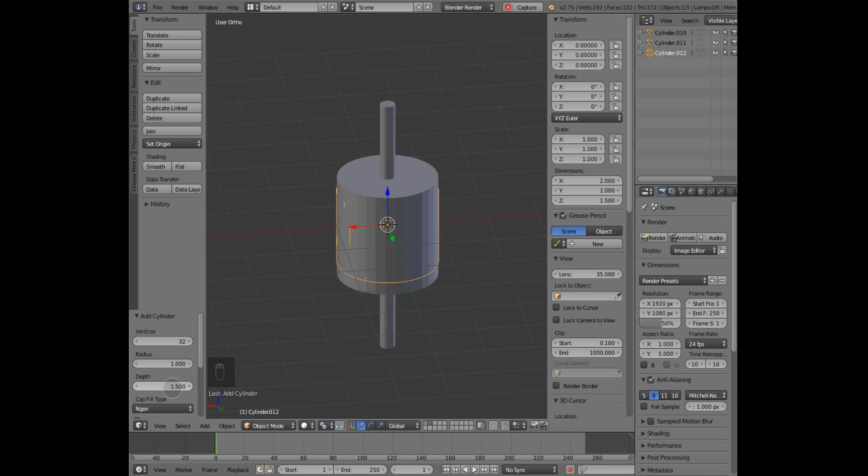So there we go, this is the base of the thing, and then we're going to add another cylinder. There's a lot of cylinders in this part, and this one is going to be just 1.5 long, and I'm going to rotate it along X by 90 degrees. I'm going to move it along X by 1 centimetre in the negative direction, and there we go, we have a secondary part.

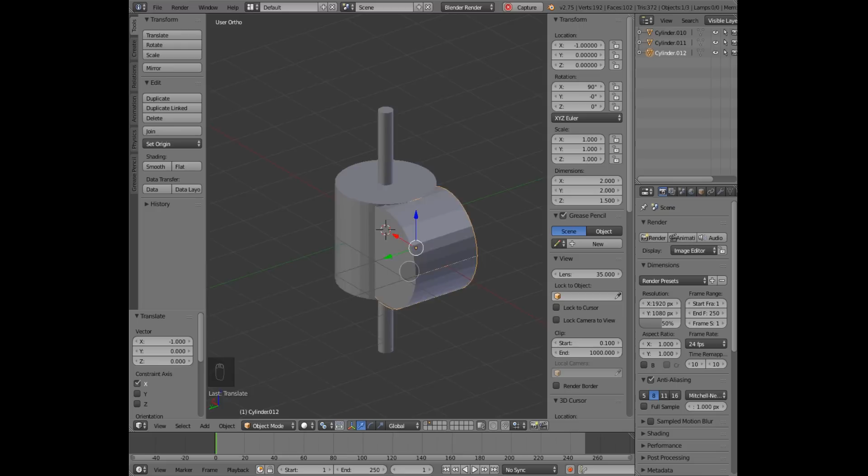And what we're planning to do is put a split down through here, and then we're going to clamp that closed onto this rod with a knob and a bolt, and I've got quite a clever scheme for being able to use a bolt in a 3D printed part. So next what we need to do is we need to make the split, and that's fairly easy.

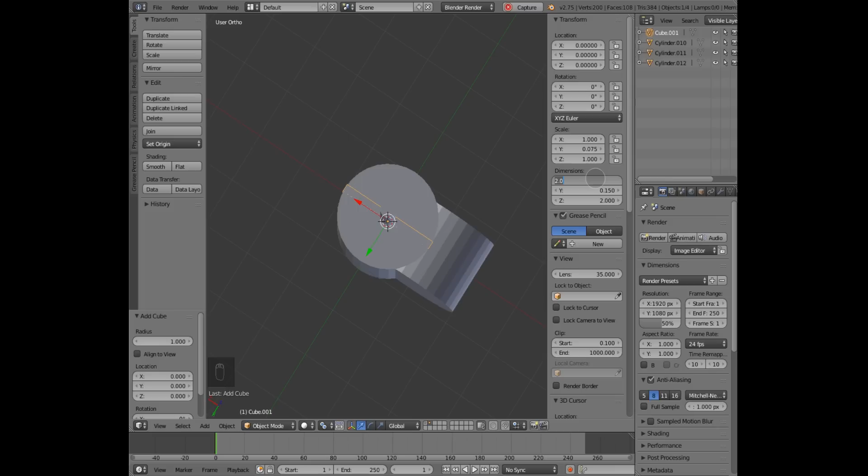What I'm going to do is add a cube. I want it to be about 0.2 maybe in that dimension. That looks about right, maybe 0.15. It's got to be about, well, we'll just leave it like that, and I'm just going to make that 3 long in the Z because we want it bigger.

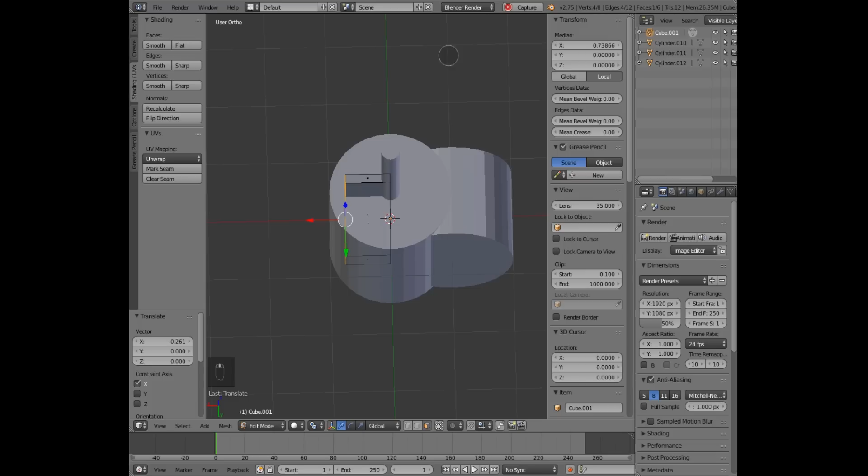Okay, and then I'm going to take this face and I'm going to move it to 0. I'm going to take this face and move it. It's more by eye. I want a fairly small area just here, so I'm going to make it 0.7. That looks about right. And I'm going to take this face again.

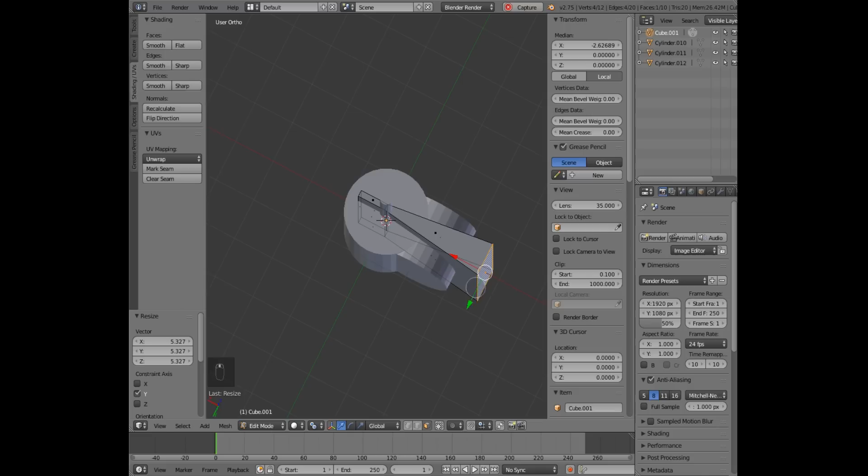I'm going to extrude it, and extrude it all the way out here, and I'm going to scale, so I'm hitting S, and then I'm going to hit Y to choose the dimension, and I'm just going to widen that out until about there. You see we've got a nice wedge shape, and if I just hit numpad 7, you'll see that maybe that's a little big, so I just scale Y again, and there we go.

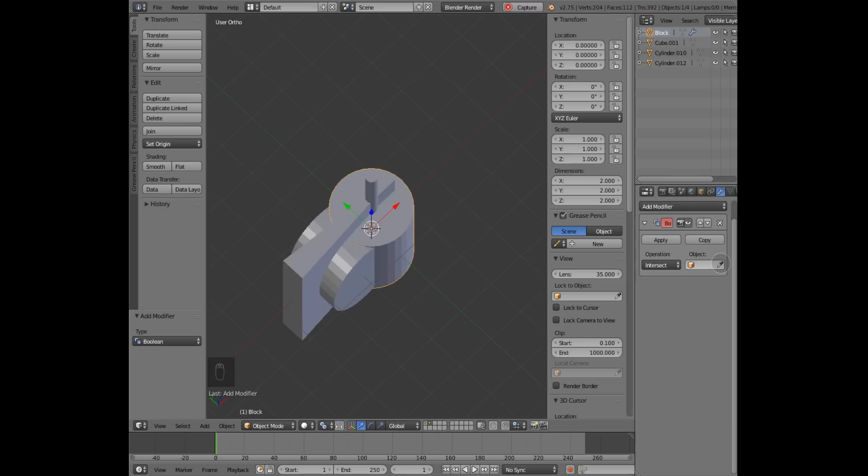We've got a cut. So now we actually want to build this into some geometry. So we select our original cylinder, and let's just rename that. For clarity, let's rename it block, because I think it's going to be a block. And I'm going to go into modifiers, and I really like using Boolean modifiers for all of my 3D printing things. It allows me to adjust things later.

I've just selected the cube there, so I actually want difference - and you can see immediately it's got a nice cut out of it.

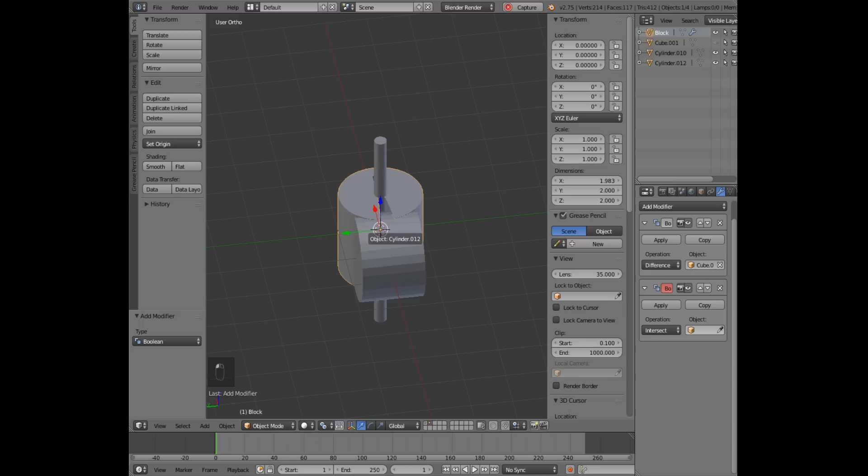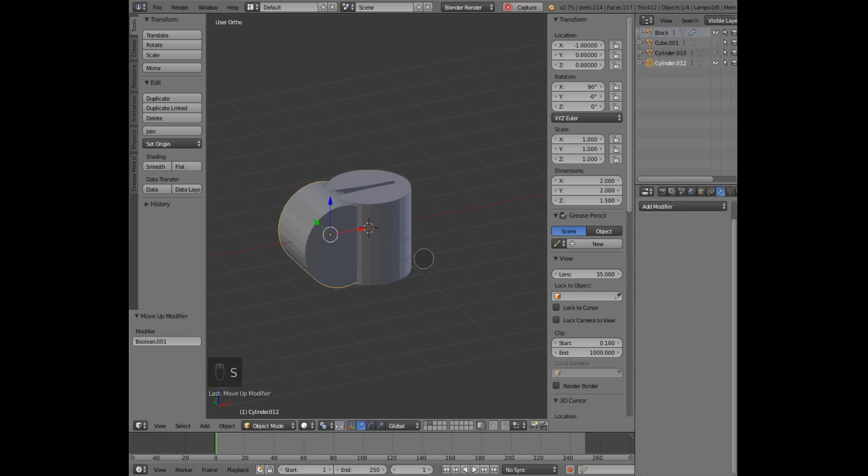I'm going to add another modifier, this one is the cylinder, and I want it union - that's in the wrong order, so I need to move that to the top, then hide those other cylinders. Something is wrong. Scale 0.99, hide that, see if it works. It does. There we go, back on track.

Add the boolean for the other operation. It's cube 001, we want to make that difference, and you can see it's coming together already.

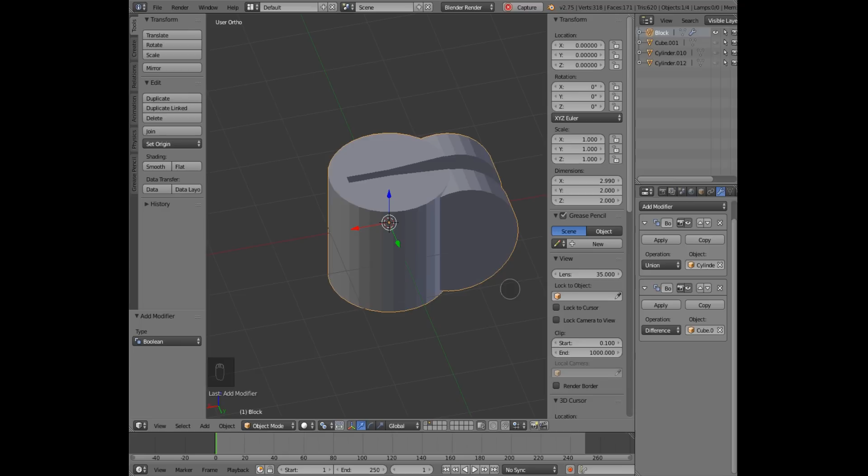So we're just going to add another boolean modifier, this time cylinder 10, and we want difference. You can see it's already looking quite a lot like a clamp - if you imagine squeezing on these two parts, it's going to flex inwards.

Next we need to model the bolt hole, so we can see where we're going to have it. I'm just going to add another cylinder - lots of cylinders. Radius of this one will be 0.2, so it's a 4mm hole. Let's make it 3 long, just so it's clearing everything.

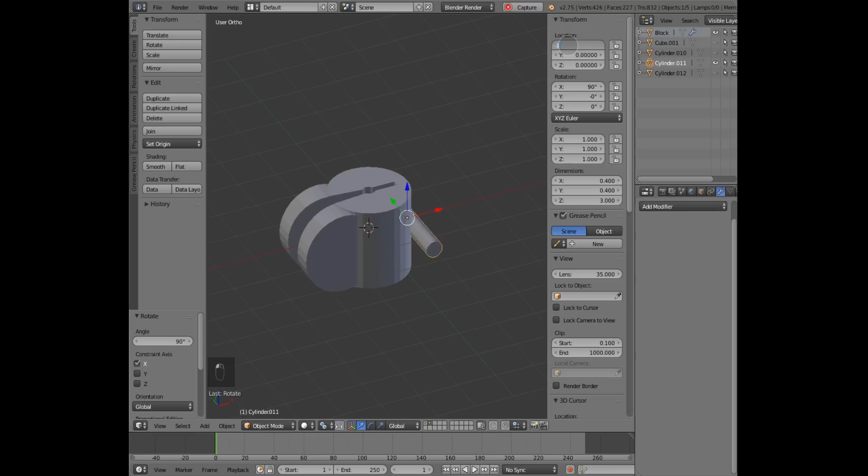Just going to rotate it in X 90 degrees. We're going to set the X coordinate to be 1, -1, and you can see it's in the middle of that cylinder, so that's good. I'm just going to get rid of it to see.

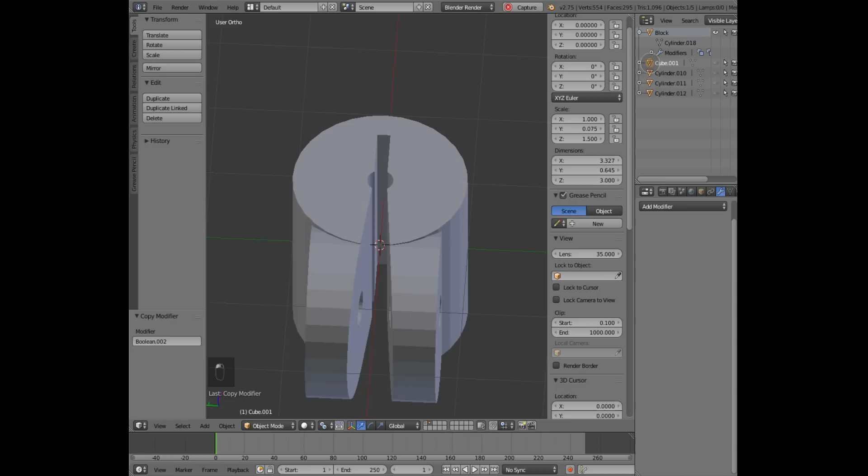So now what I usually tend to do at this point, since we're getting a lot of parts in our layer, is make this a parent. These are parts that we know are good, and they're really booleaning just this block - if we were going to have another solid, we really want it to be separate.

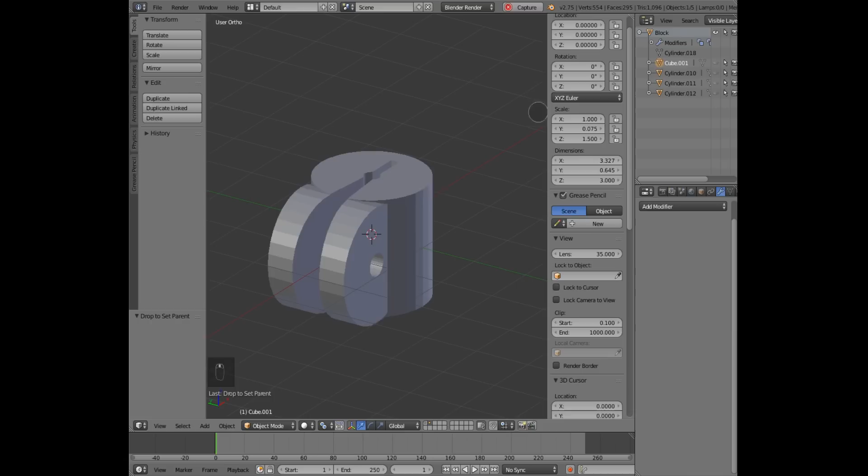It's good so far. What I need to do next is create a place for the nut to live right here - that's usually done with a 6-sided thing. Don't worry about the boolean sort of disappearing and appearing - if you have any problems with that, select the part that's got the booleans on it and hit tab twice, which takes you into mesh edit mode and back out, and that resets the boolean. That's a nice tip.

So the radius will be 0.4, because the tip to tip distance on an M4 nut is 0.766 centimeters, and we're going to round that up to 0.8 because we really want our nut to fit. We're just going to make it one long.

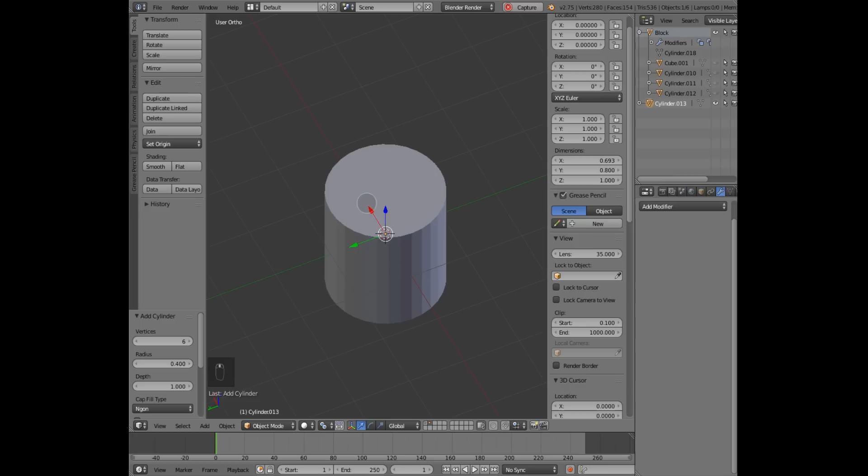Now I'm going to move it away a bit for now - actually this will need to be at -1, and we can RX90. I've turned into edit mode, so now I'm editing the mesh rather than the objects, so I can move that with GY, and then it's 0.5 because it's a 1 centimeter long mesh, and that means our coordinate reference is now at one end.

Now I'm just going to double tab on that to get back our mesh, and from here I'm going to hit 7 and hit Z, which takes us into wireframe mode, and then we can actually see the parts inside.

So what I'm going to do is put this - well, it has to be 3mm in, and that's about 2mm out, so it should be at about 0.4. That seems about right. We need to have 3mm there because the nut is 3mm long.

Then we need a relief in here, because the knob is going to have to be bigger than this nut, so it has to have a bigger cylinder cut out of it than the nut. So add another cylinder, and this time go back to 32 sides - I like 32 sides, it's good.

I'm going to make that 15mm wide, that facing, because the 8mm nut will fit beautifully into it if I just move it to -1. You can see lots of space around it, and you don't want to be printing thin walls around your nuts, because when you give them a bit of pressure they'll just break.

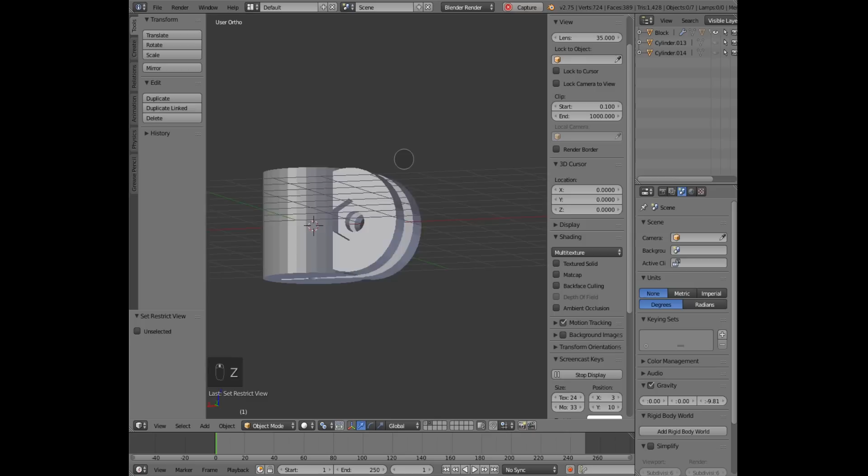And you can see that's where the nut goes. Beautiful, sitting in that piece of plastic. That's the mount for the thing.

And actually, that looks a bit deep. That looks like it is going to leave, well, it's just bigger than it needs to be, isn't it? So I'm going to GY 0.1 minus, okay, and that means that we've got a thicker wall here.

We always want as much thickness in our parts as possible because it's better for the printer and it'll make a stronger part. It means we can have a lower infill.

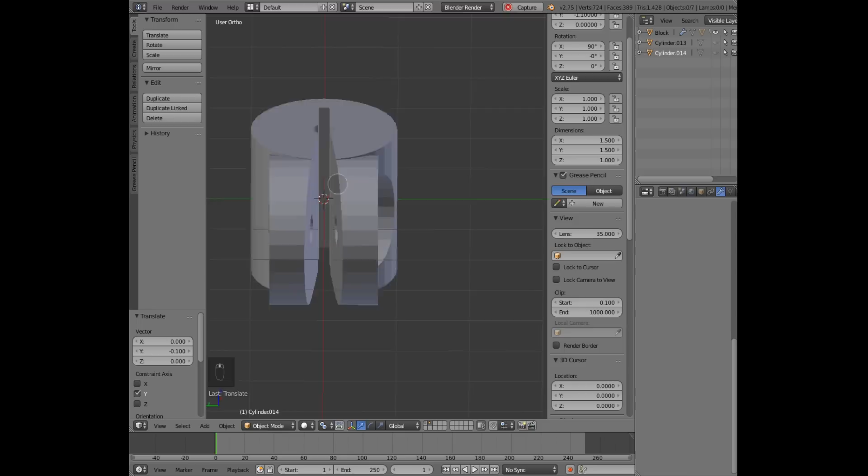So that's our clamp. It's a really simple part, and I'll show you later why I was deliberately sticking to the booleans, why I like them.

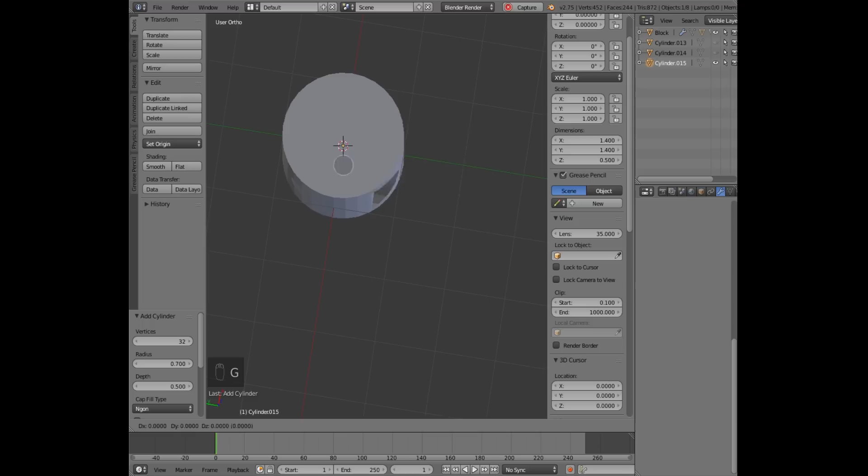So next, another cylinder. We're going to make the little knob that allows you to adjust it. Okay, so this needs to be, I'm going to make it a mil smaller, and it's only going to be 0.5 long. We're going to move it out.

RX90 it, refresh that, it's a real pain, and then we know where it needs to go. It needs to go at x minus 1, and I'm just going to go to the overview again and just move that there.

And in fact, what I'm just going to do is GY 0.25 negative, and that means that our part, the center of our part, is right on that end. And if you're getting a complex part, it's always worth having the center on a face, unless you got a good reason for it.

Okay, so let's make it minus 0.6. And I think what I'm just going to do is push that another 0.2, no, another 0.1. So that's 0.4 long now, so it's 4 mil long.

Okay, and then we're just going to extrude 0.5, scale by 2, extrude 0.5, and you've got a nice big handle there.

In fact, it's a little bit too big. I'm just going to select that loop, and we're going to scale 0.66, nope, 0.75, and that's a little bit more reasonable.

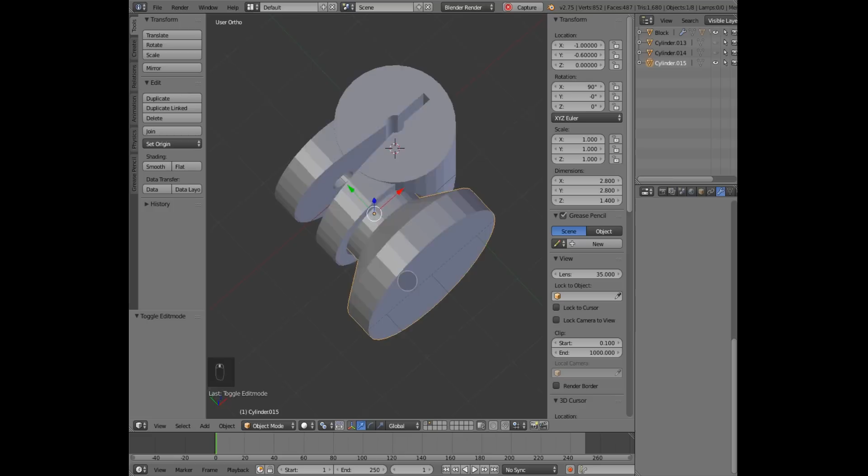Next, I'm going to add some sort of gears on the outside, and that allows us to have a better grip, because we want to be able to tighten this right down.

So I'm going to duplicate that part, and then I'm going to invert that selection, delete all the faces, and we've just got a ring of faces around here.

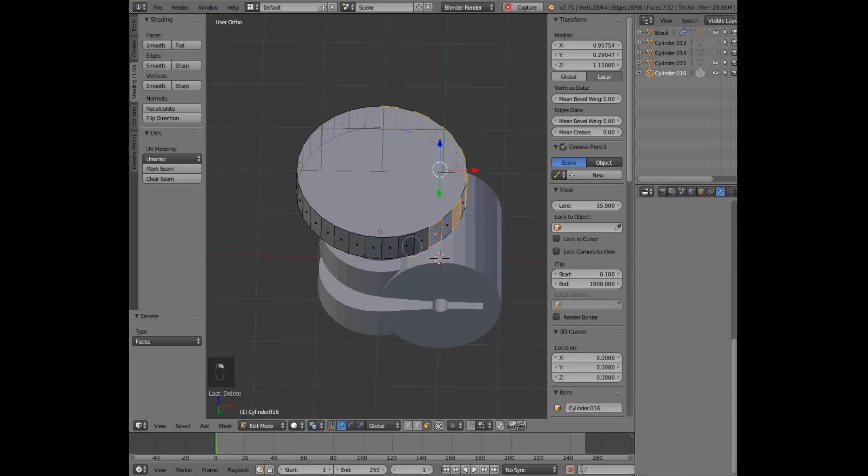Right, now, every other face, there is a way of doing this, I'm sure, but it's actually really quick to just select. Ooh, there we go. Right, and then I'm just going to delete all of those faces, because we only need every other face, and then I want to extrude individual, like this.

Okay, now if we just turn on, see, actually we want that selection, select inverse, that should fill those in nicely.

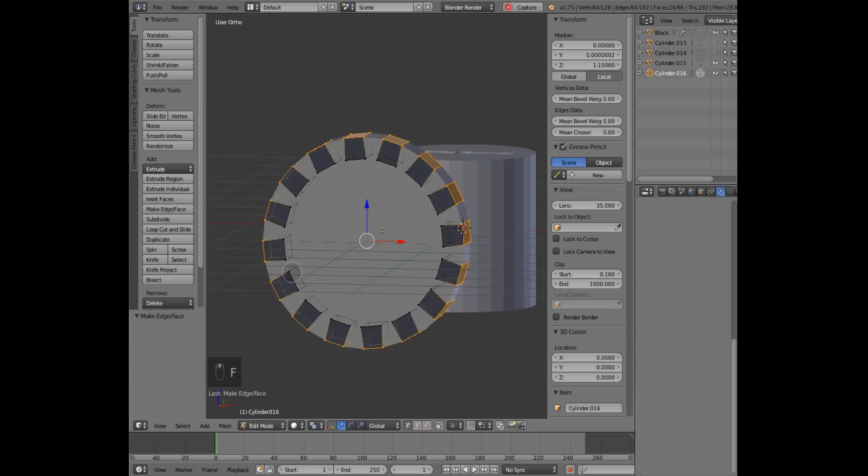Okay, now we've got some problems with our UVs, our normal direction, so we're just going to recalculate those, and you can see everything turns white. Scale Y, because we want that bigger.

And then what I'm going to do is select all of these outer faces. So if I just hit C, we've got the paint selection tool, and hopefully I won't select too many of the main faces.

So I just select that. I really screwed that one up. Okay, and then I just want to switch over to individual origins and scale Shift Y, because we don't want it to get bigger in the Y direction.

And then we just widen it out, do it till it's basically touching, switch to median point, scale that out a bit, and then we go select similar by area, and then we just...

I think we want to scale those out a little bit. Okay, and maybe just scale them individually a little bit. Shift Y. There we go.

Right, now, bit of Boolean magic time. Just going to Boolean that, select that, switch it to difference, and if I hide this, you suddenly got nice cogs. I'm just going to make that parent because it's a nice parent part.

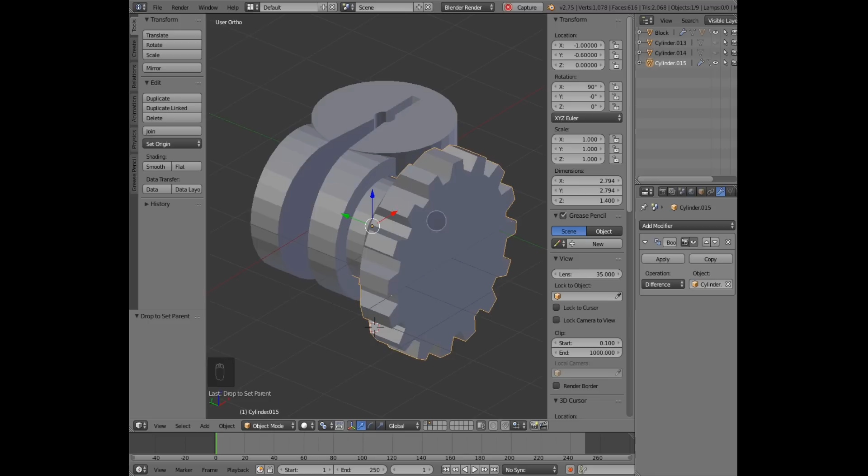Okay. Now, we need to have a way of getting the bolt and the nut in there. So I'm just going to go to the nut, find... okay, that part. Sorry about that.

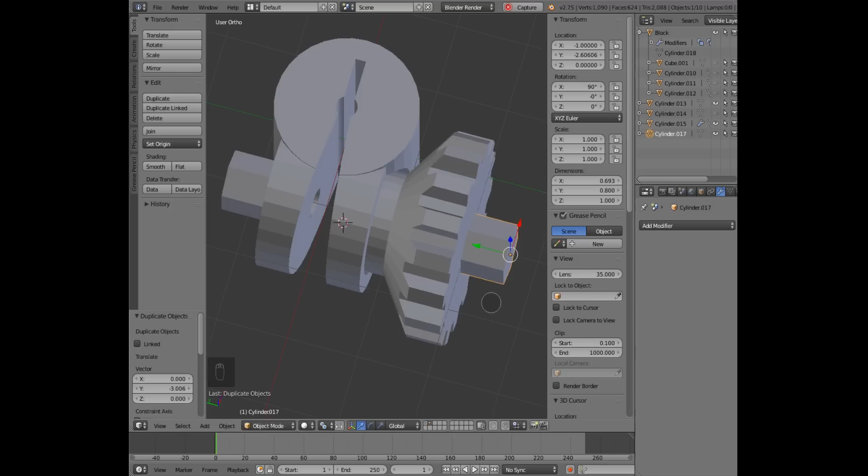And just Shift D that on the Y-axis. Okay, scale Y -1, so that's just flipping the part. Okay, scale Y, make that a bit longer, 7, Z.

Okay, now we want 2 millimeters of geometry just there, just to give it a bit of strength, so that's -0.8. And then we want to go copy that, give it that to Boolean against.

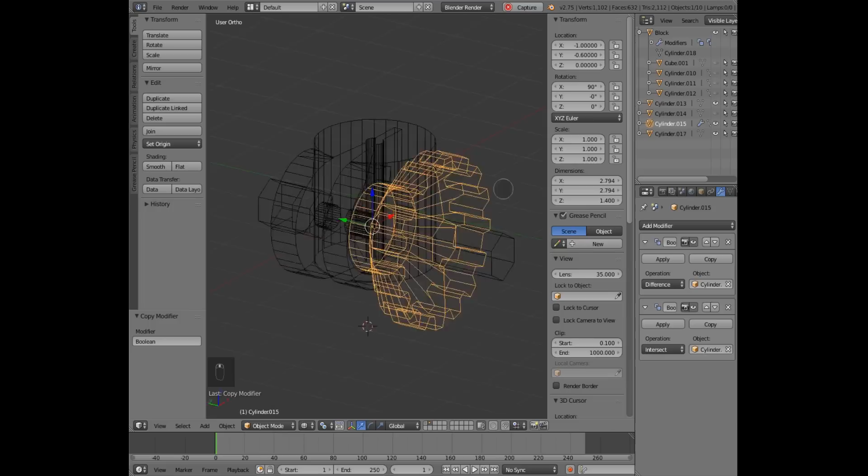Okay, and now we've got an interesting Boolean bug, and I bet if I go into union intersection, you see that's not at all what we want really. So we would put it back to difference, and then we go Control A, rotation and scale, and then it still doesn't work. So what do we do?

Try, we'll just put it into intersect for a while. Okay, it's a mysterious bug.

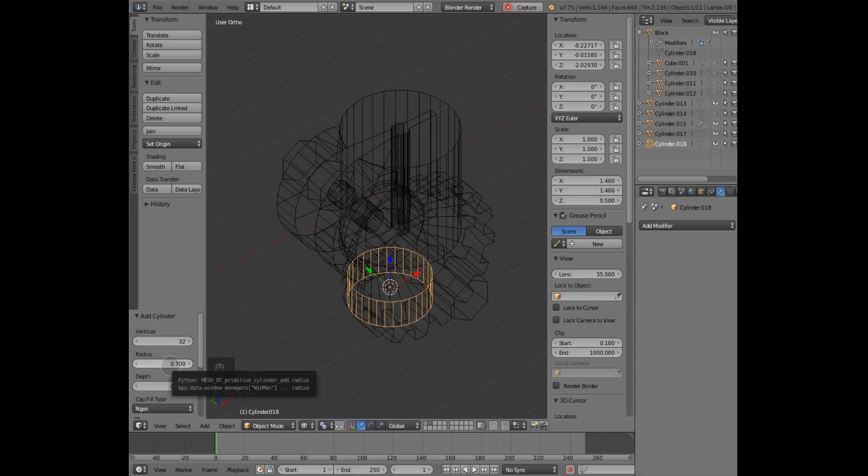Now we want a cylinder. 32 sides will do again, and the radius, I'm just going to get one of my bolts and measure it, and we've got a 0.75 millimeter head, so I'm now going to do a 0.75 over 2, 0.375 radius, and the depth will be, say, 1.

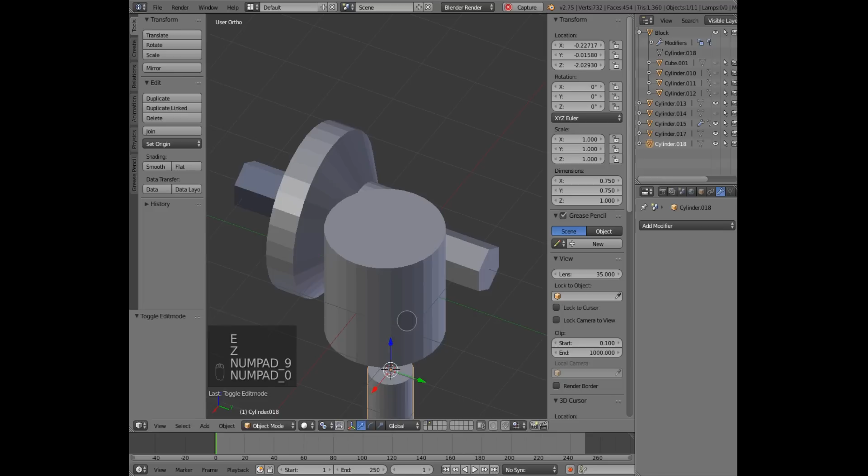And then we're going to G Z minus 0.5, and then we're going to R X 90, nope, hang on, R X 90. We can see what our problem is there.

That nut has somehow got all of its normals reversed, so we're going to tab that. Okay, and now we can see that has gone back to doing what we thought it was going to do.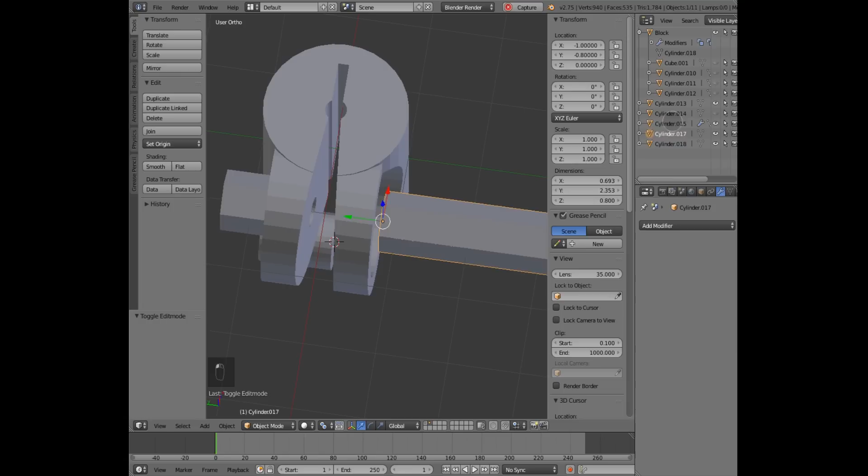So this is a good time to name our part handle, so we know that that's the one that matters, and then just go cylinder 18 again.

What do we want to do? We want to set that at the minus 0.5, 0, 0. That should be -1 because that's the x-axis. It was the y-axis I was thinking of.

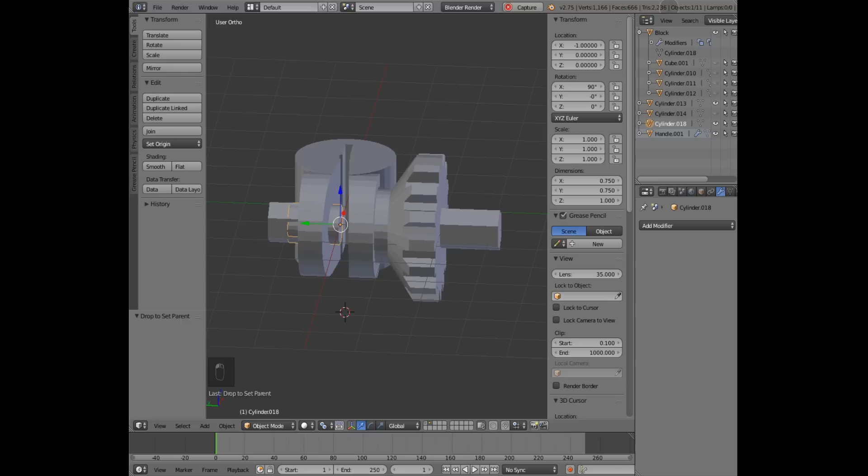We now RZ 180. So we just flip that round, and then if we go back to 7Z, we see, right, so now we want 3 millimeters in that nut, so that has to be minus 0.6 for the y coordinate. There we go.

And this I am just going to scale in the Y a bit more. Control A, rotation and scale, copy this, and there we go. So hide those.

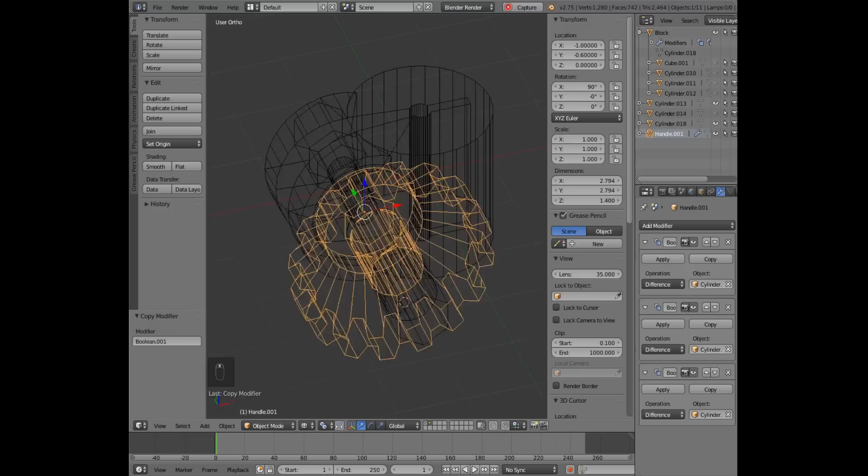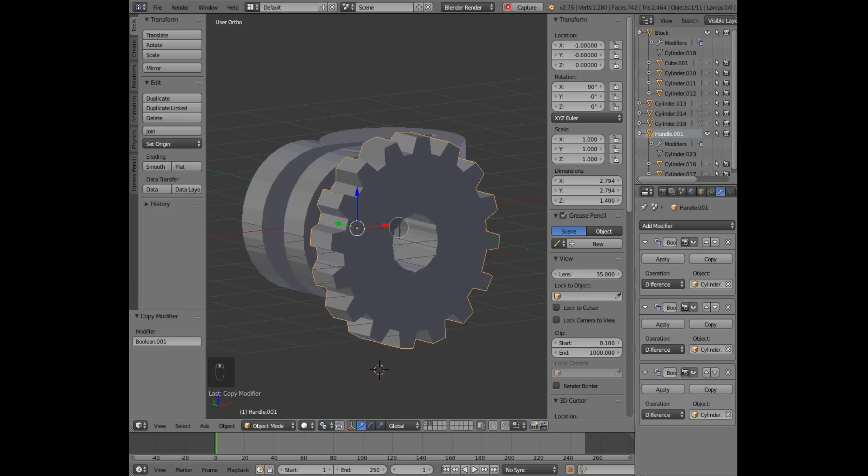And you have a more or less ready to print part. You can see, so what's going to happen is dropping a nut in there, and then we've got a pan-headed screw that screws into that nut, and then they lock together because nuts lock together when you screw them tight, and that means that you've got a screw basically locked into here.

Now it could come out this way, out here, but it's not going to, because on the other side you've got a nut dropped into there and they're screwed in, and then as you do this handle up you should get this to closing. So to get this out into an STL, I just go File, Export, STL, and then that's the handle, Export STL, and I do the same for the block.

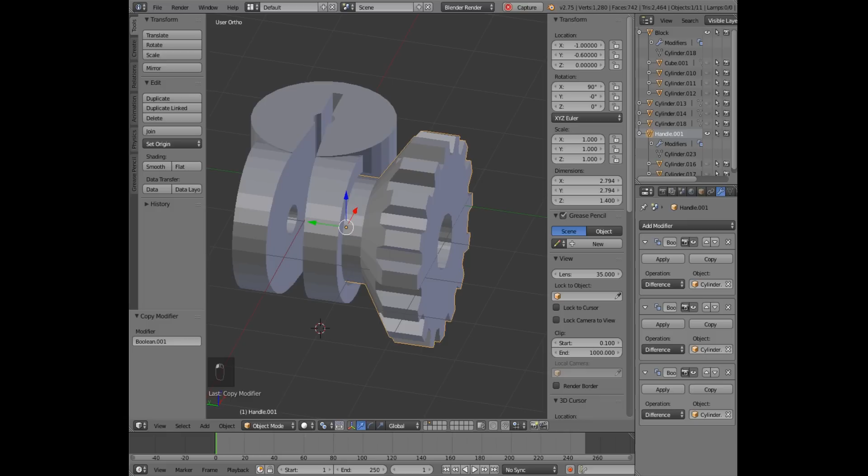Before you do that, it's probably worth doing a tab to make sure the booleans are fine, but as you can see it's sort of all ready to go. We'll have to rotate this round in the slicer because we want this side down, even though it's got a little bit...

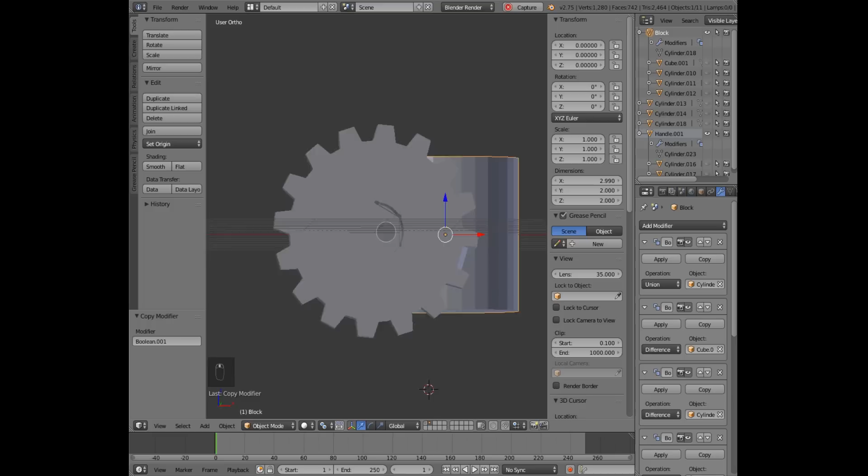Oh, hang on, hold up. What we actually need is to find this - completely forgot about that. Also, I completely forgot about adding some clearance, but that's not really necessary with the trick I'm going to tell you. So now what we need to do is Shift-D this, move it to the handle parent, and then I'm going to hide it, and then duplicate that, get rid of that - it's probably cylinder 18, I imagine.

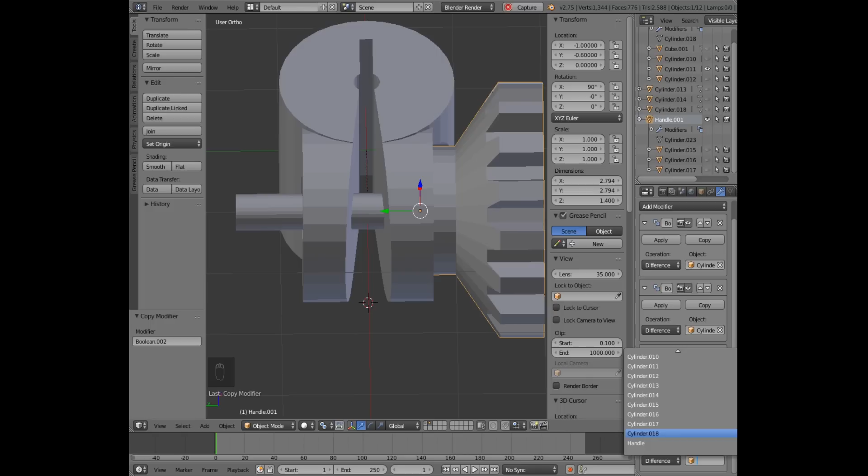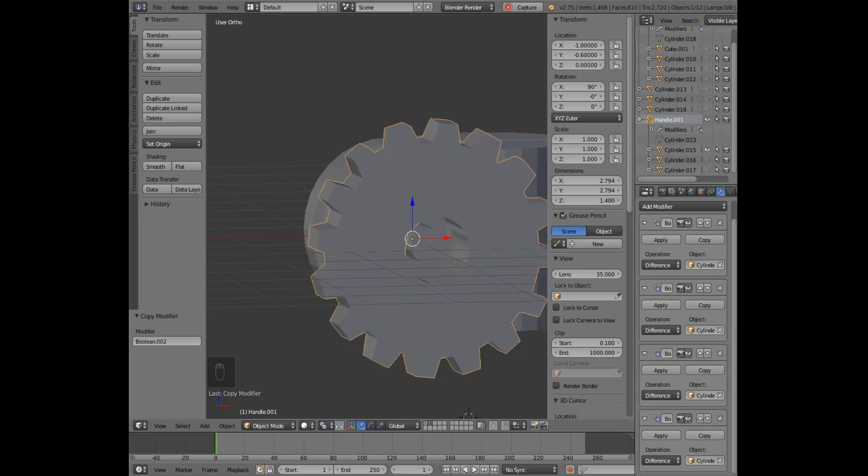So if I hide whatever... nope... mysterious. Cylinder 15, nice. There we go, 15, get rid of that, hide that. You can see it now, it goes all the way through. That's a lot more sensible.

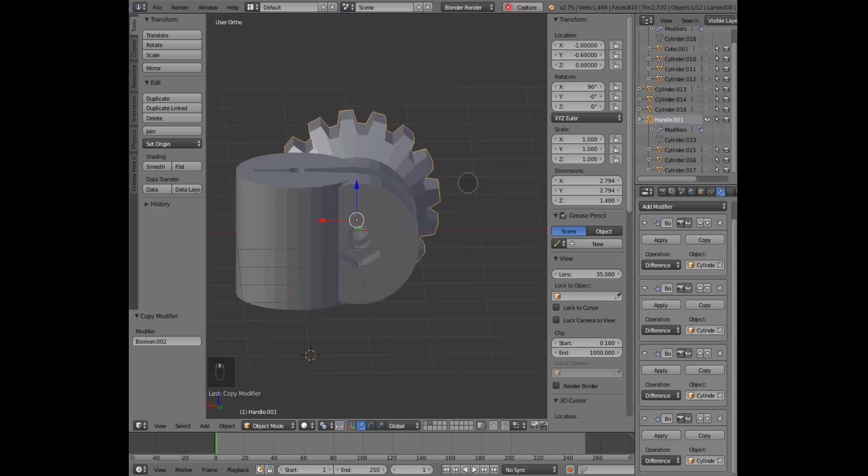Now, if we were not quite sure about our printer, we might make some of these holes a little bit bigger. I've already added some wiggle room in some of them, but particularly this hole and this hole might just benefit from being 0.5 mil bigger, just to allow more clearance. But I'm pretty happy with the printer, so I'm just going to save this, export the STLs, and then we'll get to the slicer.

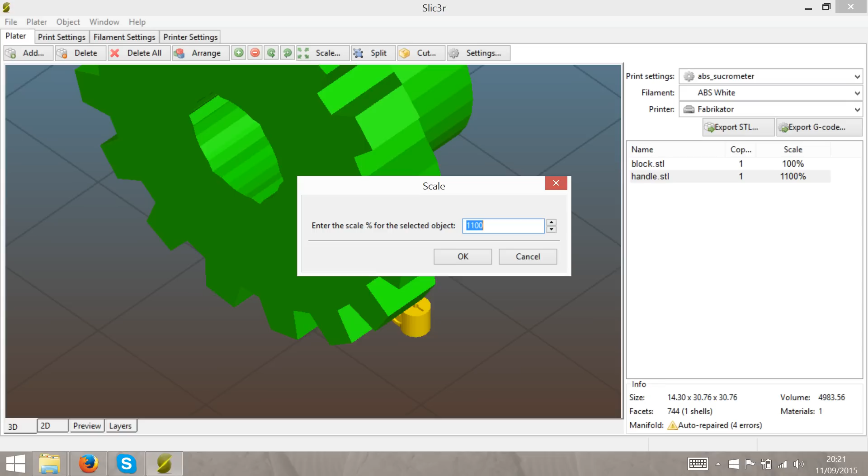Okay, so we've imported both of the models into the slicer, and as you can see they're really tiny. We've got to scale them up by a 10 times factor because Blender, and then we're also going to add an extra 10% to the scaling factor, so that makes like 1100, because we're using white ABS, and ABS contracts about 10% when it cools, and we want our parts to be dimensionally correct.

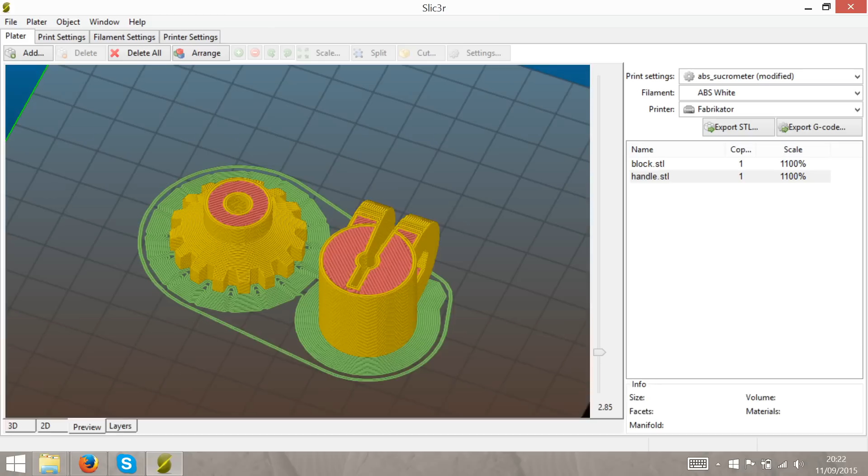Then we've got to rotate the knob 90 degrees around the y-axis so it lies flat, so the big face lies flat. And so there they are. They need to be spaced apart a bit. Then 0.2 mil layer height, 20% rectilinear infill - we like rectilinear because it's much quieter. 6 mil brim to keep it stuck down, and those are the speeds and temperatures. So there we go, we've got a model ready to go. It just needs to be printed now, and here it is.

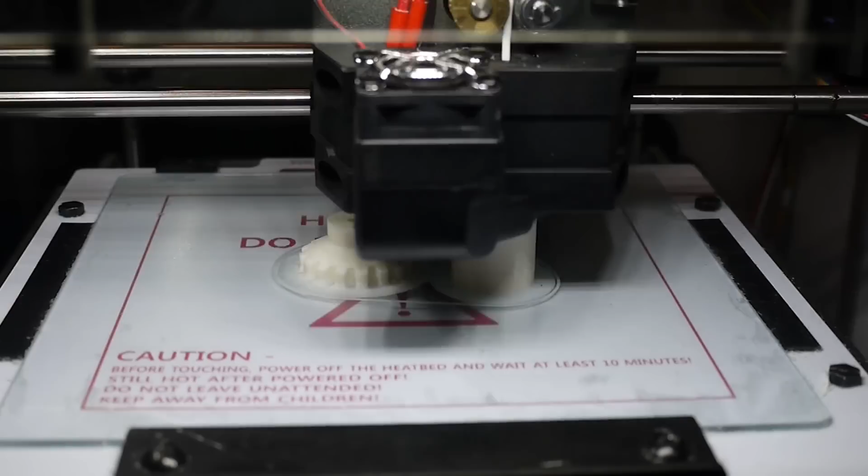Okay, so here's the parts printed, and I just ripped the brim off them - that's very easy. You can see it's got a bit of flashing still on there, so we might have to do something else. See the overhang there is a bit crap, but apart from that it looks good.

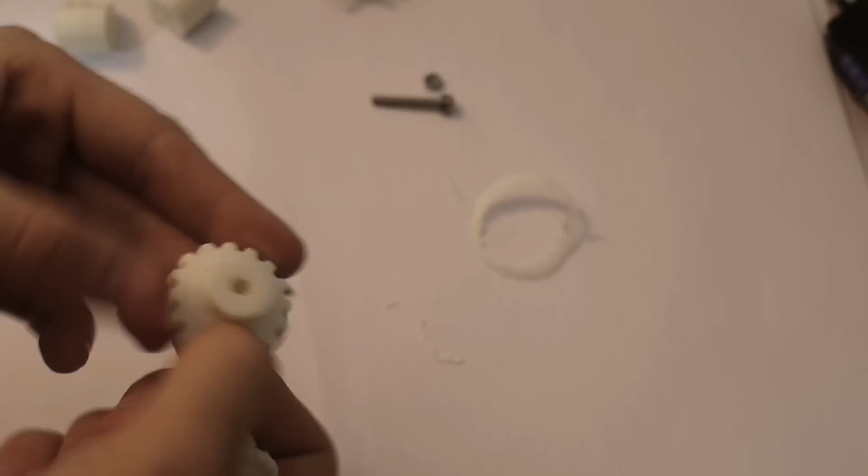There's a nice flex to the part. Maybe higher infill or more perimeters would be a good plan to make it stronger. You see a little gap in the perimeter there, but this part is mostly for gripping, it doesn't matter too strong. It's pretty much done - that's not going anywhere.

So to assemble, all we have to do is we've got a 30mm M4 with a nut done all the way up to the top, and that means that they're sort of locked together. If I was being really serious about this, I would get an Allen key and a spanner and put those together more permanently. Then we just thread this in the top, we turn it around so it pops in.

So you just tighten it up, and it tightens closed, and there's really not much spring resistance in this. So if you put it on a shaft - this is a 3mm sort of ground shaft, these were ridiculously cheap on eBay - you can just screw it up nice and easy, finger tight, and it's not going anywhere. Like, I can't hold the thing, and you just loosen it off again.

Beautiful. Need to tidy up some of this flashing because it's sort of abrasive on the fingers, but apart from that, it's pretty much done.